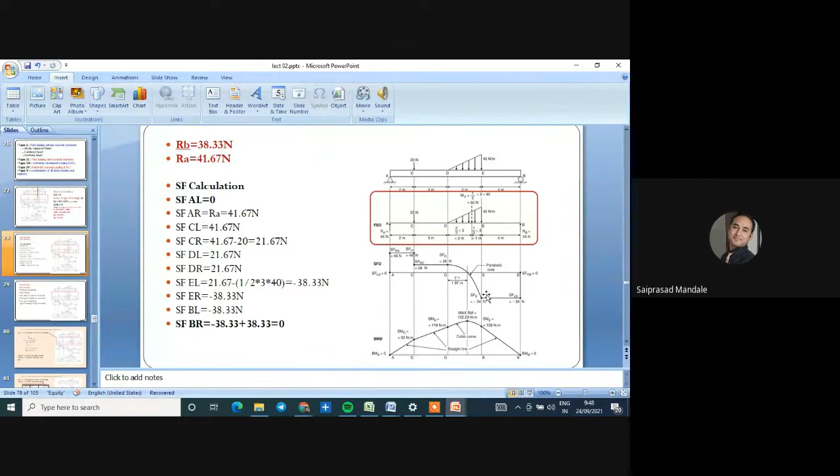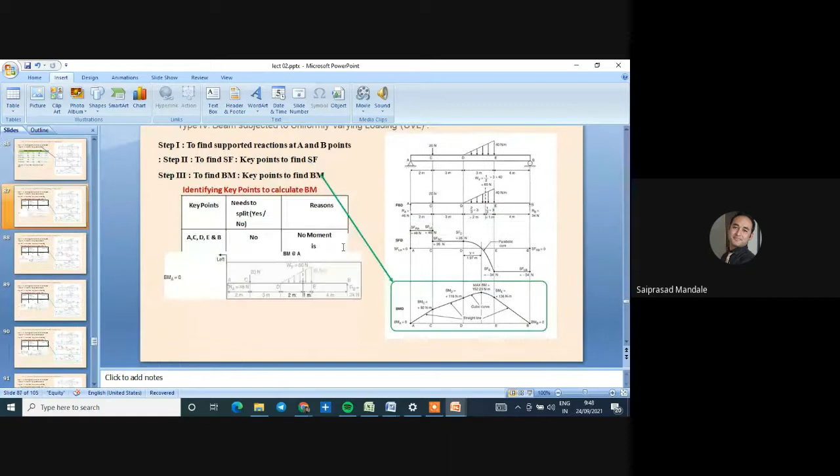I hope the calculation is clear to everybody and you have drawn this diagram. Now I am moving towards the next type of the numerical, which is now the combination of this. This is the new type of numerical, which is the combination of combined loading. Last type.

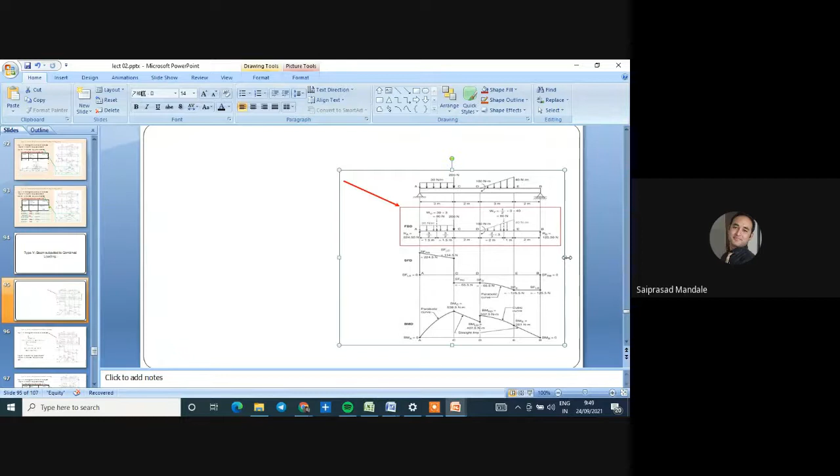This is the diagram. This is the loading diagram, and in that loading diagram, let us check what are the different loads we have with us, and from that we'll go to draw the free body diagram, and then move for the calculations. So this is the last case, type 5, which is nothing but the beam subjected to combined loading. Combined loading means it consists of point load, it may consist of UDL, it may consist of UVL, and the combination of all this. So here it is the case.

Can anybody tell me what are the different forces acting on that beam? Forces, and what are the different moments acting on the beam? Please try to tell me. Let me check from that whether my screen is visible to you or not, whether my screen is properly visible to you or not. Let me check, please tell me.

Anjali Santa, Shital Jagtap, Sonu Sunsar, Lokesh, Nilesh, Pansare, Rishikesh, Sahil Saurabh - the diagram is there in front of you. I'm just expecting what are the different forces and moments acting on that beam. Please unmute and tell me. Anyone? You can type in the chat box also. Please tell me.

Sahil is saying, sir, UDL is there, UVL is there, point load is there. Sahil, one more force, one more quantity is there which is missing. Try to find out. One more quantity is there.

दिव्या तुम्ही आहात का इथे? Tell me, external moment. Only Sahil Tang is active. What about others? Let me talk to one by one. I want very active sessions. Abhijit, I hear Abhijit. Those who are not interacting with me, I will mark them absent today. I want very active participation in the lectures.

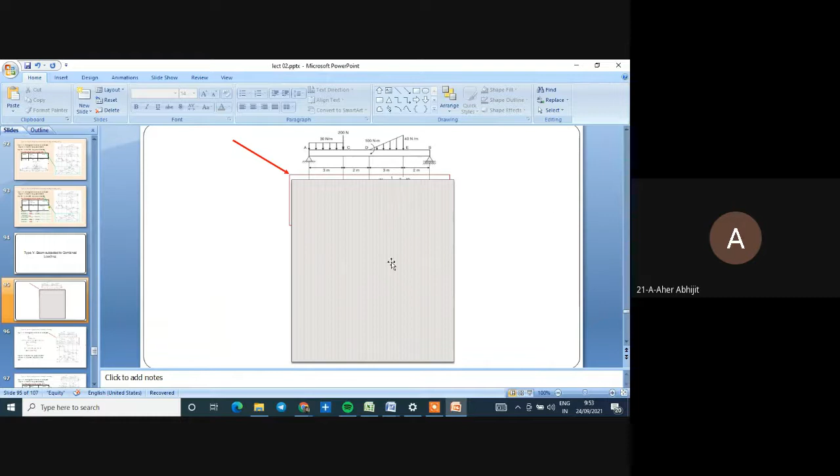युडीएल ची इंटेन्सिटी किती आहे ते सांग. What is the intensity of UDL, you can see my screen na? Yes sir. Then tell me what is the intensity of UDL. Okay, second question goes to Jagtap Shital: what is the intensity of UDL? I can ask randomly, yeah? Shital Jagtap, what is the intensity of UDL? Shital Jagtap, what is the intensity of point load? What is the intensity, what is the magnitude of point load?

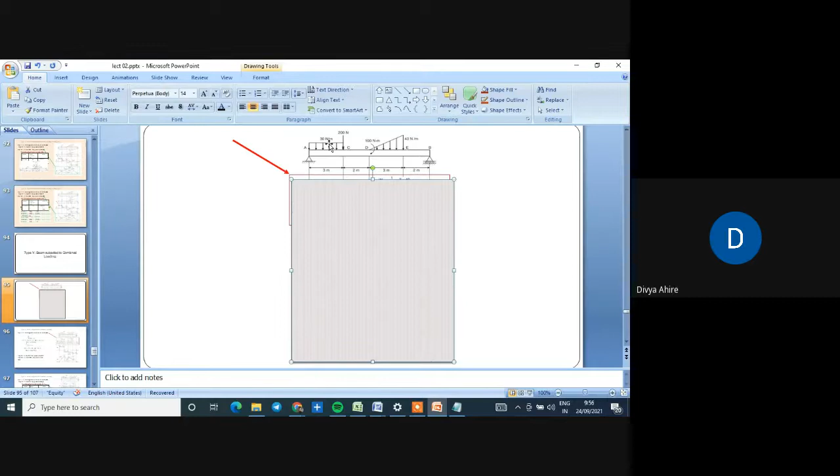I will definitely mark them absent. Divya Ahire. Divya Ahire. Yes, sir. Please tell me what is the intensity of UDL? So 30 Newton meter. 30 Newton per meter. 30 Newton per meter. व्हेरी गुड, नाईस आन्सर.

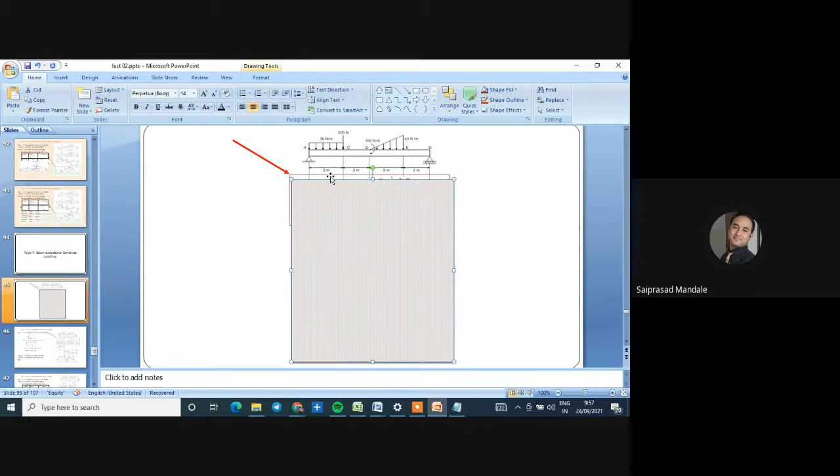What is the intensity of point load? What is the intensity of point load? Krishna Nikam. 200 Newton. परफेक्टली करेक्ट.

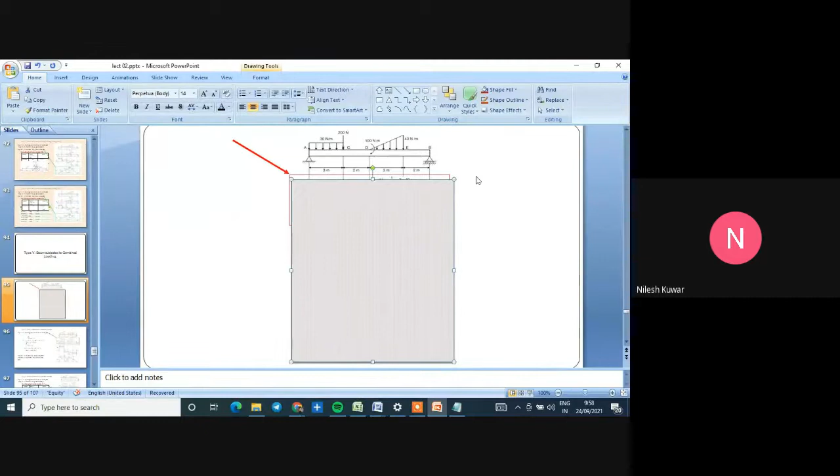0 to 100 Newton. 100 Newton meter. 100 Newton meter is the UVL? 40 Newton. 40 Newton meter. 40 Newton meter. Good.

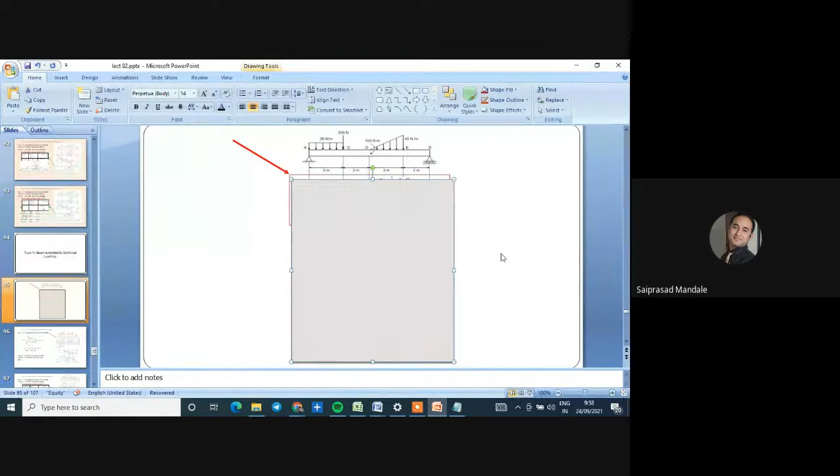Yes, sir. What is the magnitude of moment acting on that beam?

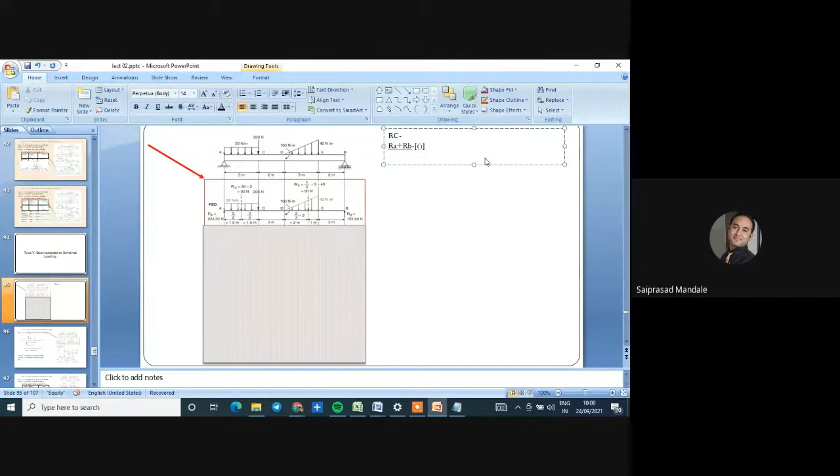बोला. हाँ 30 into 3. Very good. 30 into 3, very good. Then minus, tell me.

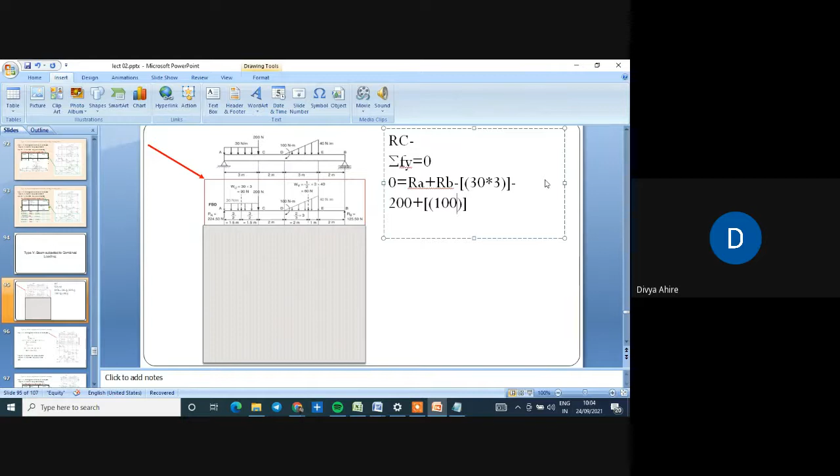Okay. Tell me next whether I have to consider this 100 Newton meter or not. Whether I have to consider that 100 Newton meter or not. Tell me. Divya? Yes, sir. 200 into 100 into 2. Tell me equation, please. Plus or minus? Plus, बोलो. 100 into 2 plus 3. 100 into 2 plus 3, na? Yes.

Now, everybody agrees with this? First thing is this is the moment, 100 Newton meter. It is already a moment. And right now we are focusing on the summation of Fy. We need a force calculation. When there is a force calculation, there is no role of moment.

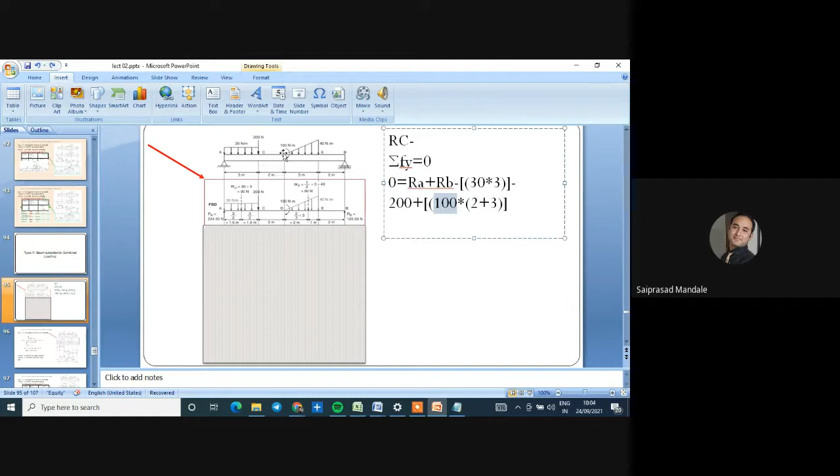Okay. And second thing is you have done over here 100 into 2 plus 3, means you are considering 100 into this distance. So already this is a moment, and again you are multiplying this distance. So it is a force calculation. So first thing is whenever there is a force calculation, we have to neglect all the moments.

So my next question is whether in that calculation I have to consider that 100 Newton meter moment or not. This is a summation of Fy. I am focusing on force calculation. Shital, can I consider 100 Newton meter over here or not? I have already given you the answer.

Reaction calculation check नाही तुम्हाला? बोला. Shital Jagtap, I am waiting for your reply. Else anybody, you can put it into the chat box. Nilesh, Sahil, Kalpesh, Devre, Nilesh Kuwar, Sahil. No reply. मग फक्त मी बोलत राहू आणि तुम्ही ऐकत राहणार असं करायचंय का?

So we have to neglect this 100. No moment. We are not going to consider the moment because this is a force calculation. So this is 200, and then we have to consider this UVL. So for UVL, half into length is 3 into width is 40. This is the intensity. Okay. Then summation of Fy is equal to 0.

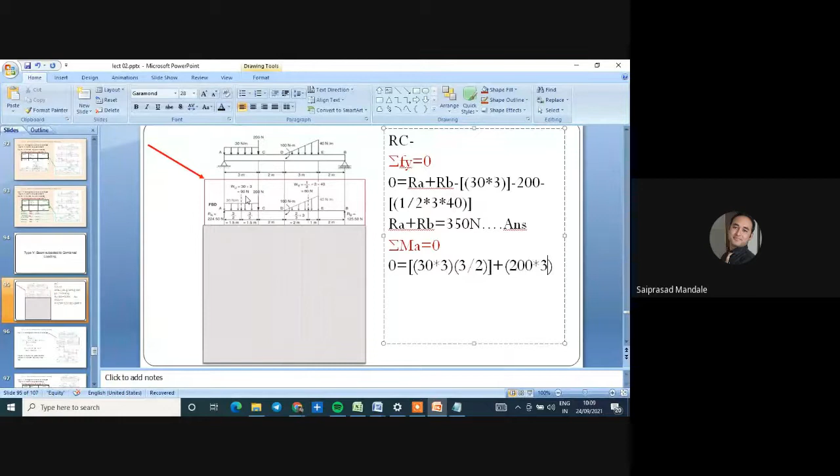Then the next step is to calculate moment. Everybody has to do this calculation and tell me the answer. Summation of moment at A is always equal to 0. Divya, can you try? 0 is equal to 30 into 3, and it acts at a distance of half, so 3 by 2. Second is clockwise, so it is plus 200 into 3. Then 100 is clockwise, directly we are putting 100.

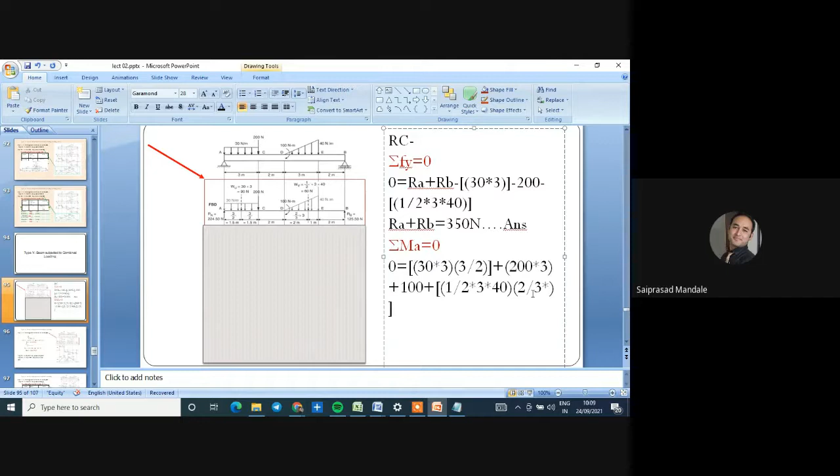Plus half into length is 3 into width is 40. Now it acts at a distance of 2L by 3 and L by 3. From 0 it acts at 2/3 of L. So 2/3 of length, 3, plus 3 plus 2. Try to understand this equation. This is a very important equation.

30 into 3 into 3 by 2. Perfect. 200 into 3. Perfect. Plus 100 is clockwise, so as it is. Now here, intensity is half into length into width. Then it acts at 2/3 from the left hand side. So 3 plus 2 plus 2/3 of L. We have to make a calculation of this.

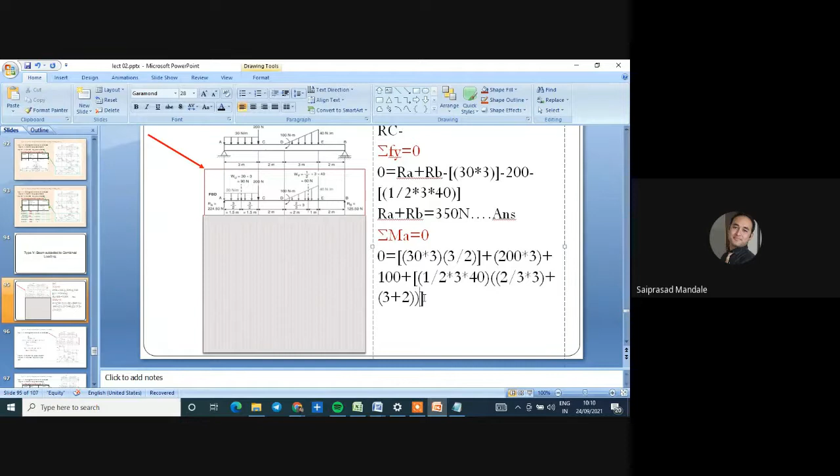And then minus RB into 3 plus 2 plus 3 plus 2, that is 10 RB. So from that you have to tell me the value of RB. If you understood this equation, this is very important. Everybody has to focus on this. If you know the answer, please tell me the value of RB.

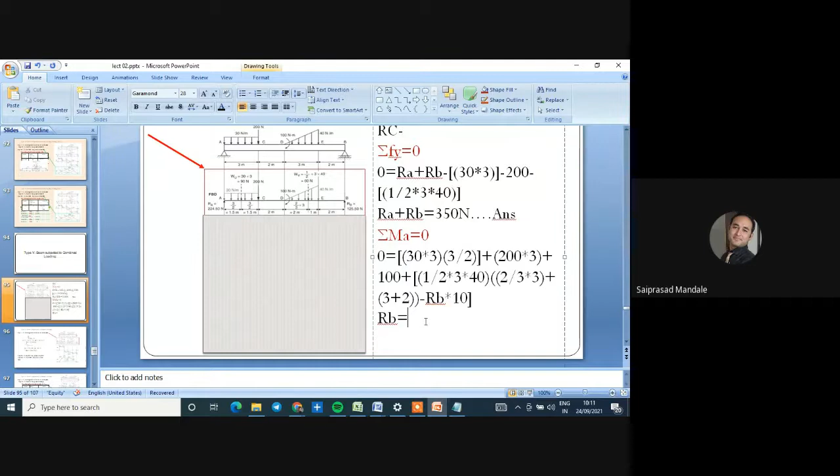30 into 3 is 90 into 1.5, so it is 135, plus 200 into 3 is 600, plus 100, plus 20 into 3, 60, and 60 into 2/3 of L means 3 gets cancelled, into 2, plus 2 plus 3, 7. So RB equals 135 plus 600 plus 100 plus 420, 1255. Here it is 10 RB, so divided by 10 is equal to 125.5. Please make a calculation whether our answers are right or wrong.

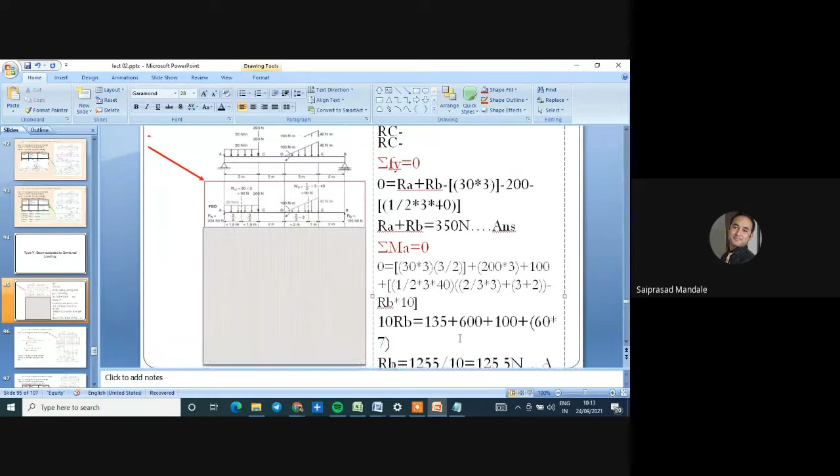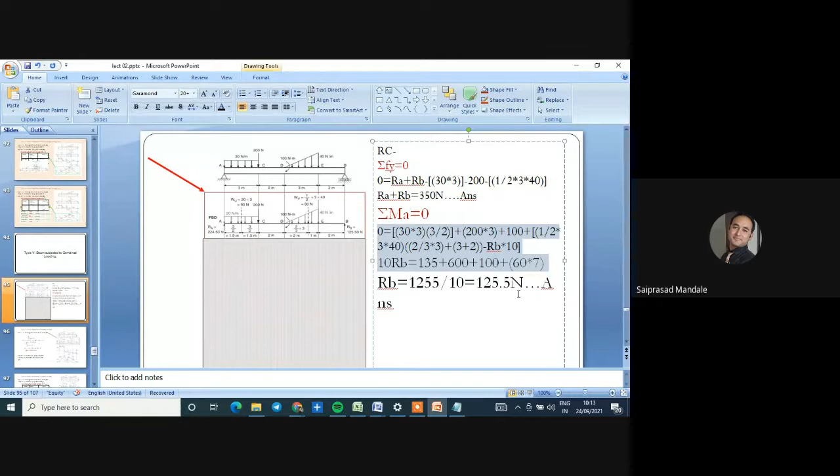Let me check the answers. So it is 224 and RA. See, 125.50. So the answers are matching. This is my answer of RB. Then tell me RA is equal to. So RA becomes 350 minus 125.5, it will be equal to 224.5 Newton. Please do the calculations and tell me whether the answers are right or wrong. Everybody has to tell me the answers.

Any doubt or query in that equation? Very important. This is a new variety, this is the combination. Abhijit Ahir? Yes, sir. काय doubt? No, sir. Shital Jagtap, clear? Yes, sir. Sonu Samsare, he is not there.

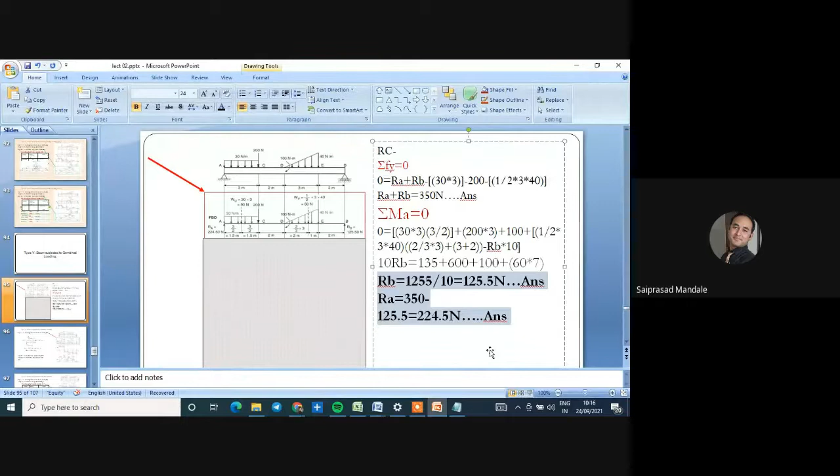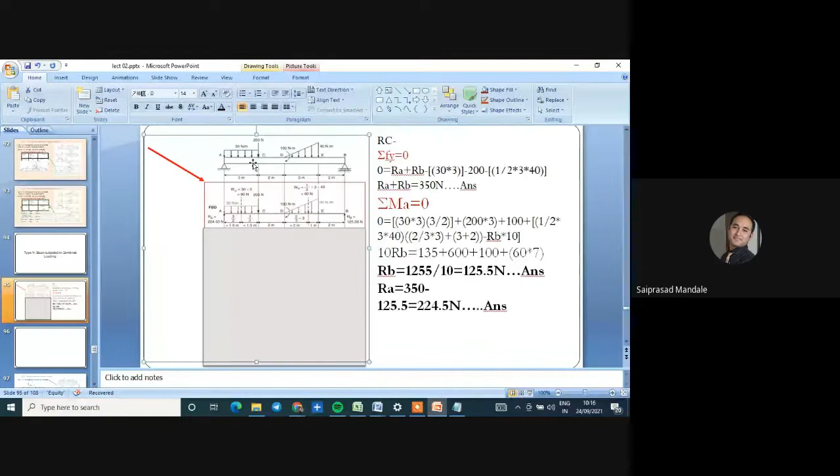Okay, good. Now this is a very important step that we have already done, and you just try to calculate whether your answers are matching or not. Okay. Then the next step is what we have to do. We have to calculate reaction calculation, SF calculation.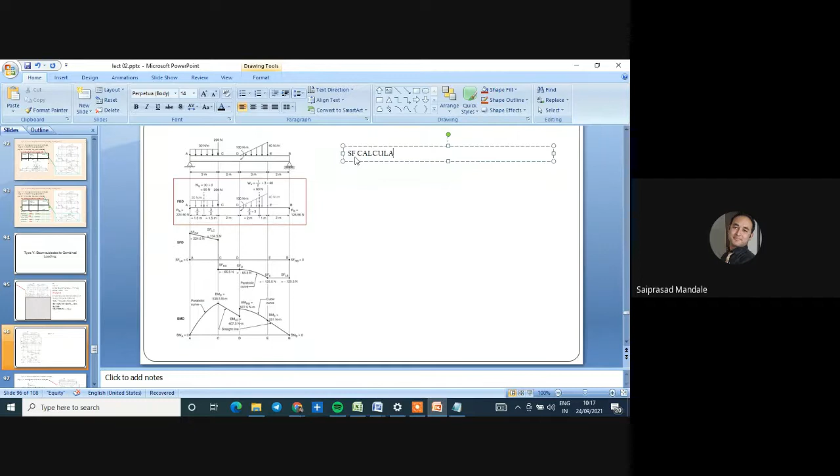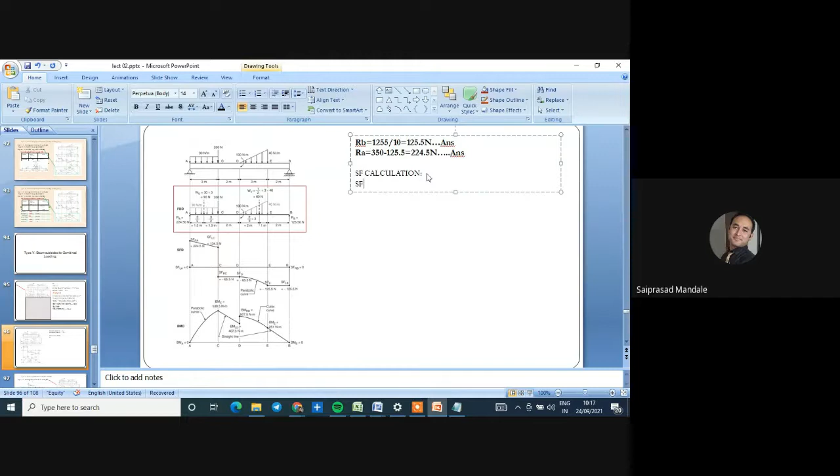A, C, D, E, and B. Okay, so is there anyone who can help me out with this calculation, SF calculation? I'm going to tell you the first answer and the last answer. I can tell you the answer at the left, which is 125.5. Minus 125.5. This is the answer. I have already given you the answer of this.

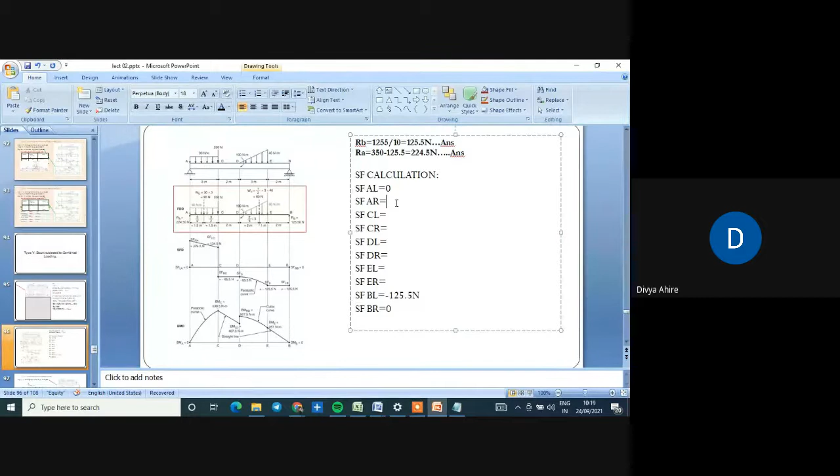So tell me, shear force at right of A. Tell me. Shear force at right. Divya Ahire. Divya. Yes, sir. Shear force at right of it. RA value. Tell me. You are right. You are absolutely right. 224.5 Newton. RA, perfectly correct. So it is RA, which is equal to 224.5 Newton. Perfectly correct.

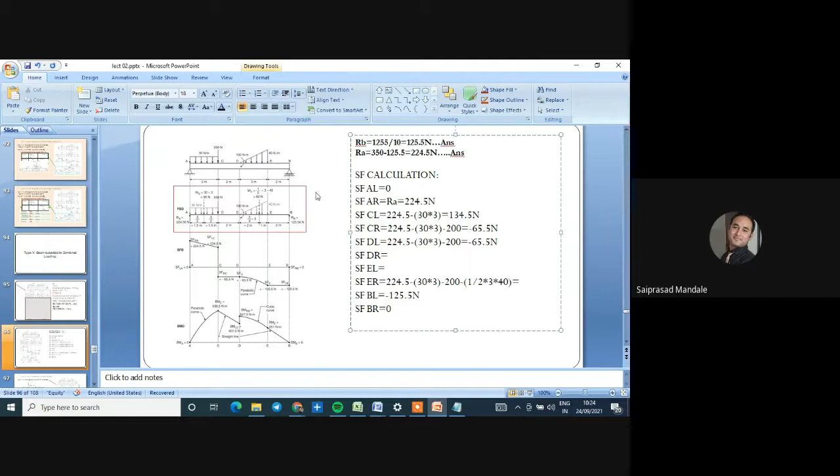Left of D is done. Left of D is same. Right of D is also same because there is no force. In the moments, we are neglecting the moment. Right of D is same. Then left of E. Left of E is this. Right of E is also this.

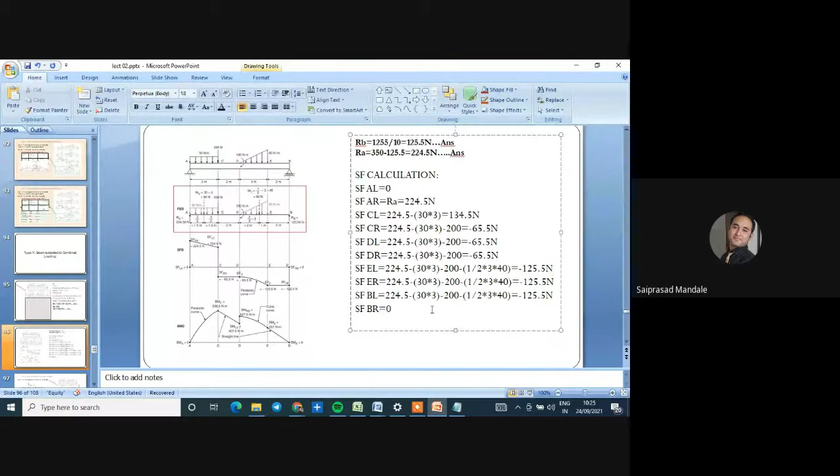And then left of B is also same. And here it should be equal to minus 125.5. It also equals to minus 125.5 Newton. You can check and you can tell me the answers. Please check the values and tell me whether the answers are right or wrong. If anybody is having any doubt, please ask me.

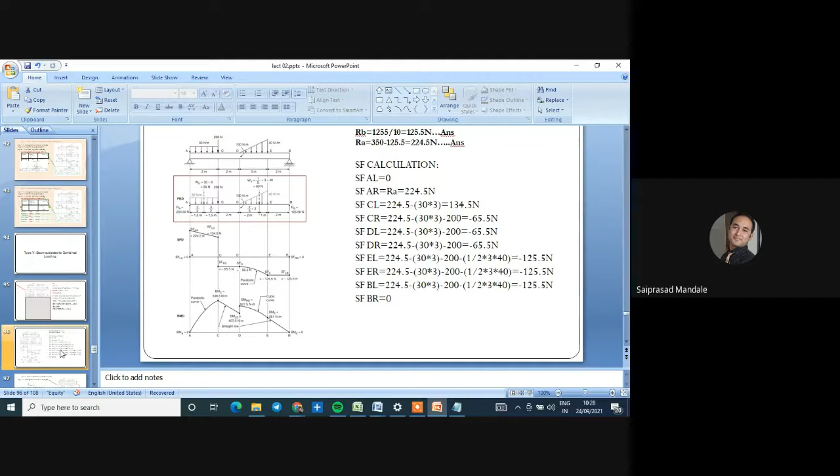This is now BM calculation. BM calculation. Moment at A is equal to how much? Moment at B is equal to how much? Everybody tell me. Moment at A is equal to, moment at B is equal to.

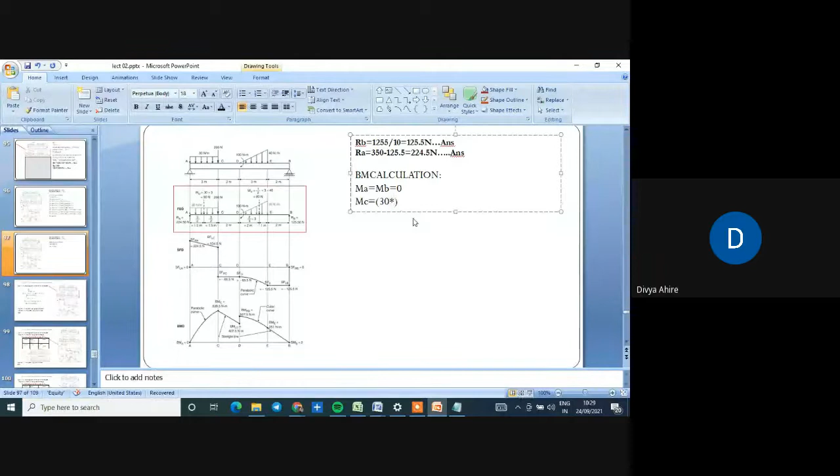Moment at C. Tell me, moment at C. Divya, fast. 30 into 3 into 3 by 2. Clear? Yes, sir. This is first, then we won't consider 200, then moment at C is done.

Moment at D is equal to 30 into 3 into 3 by 2 plus 2. Okay, then minus 200 into 2.

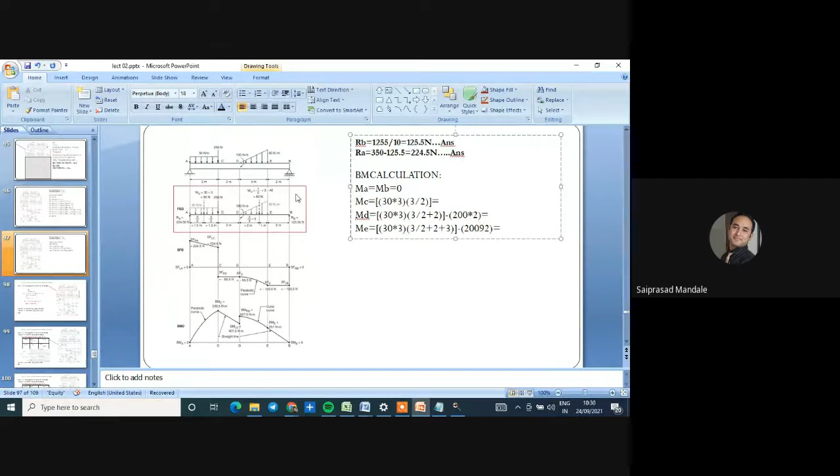Moment at C done, moment at D done, moment at E is equal to 30 into 3 into 3 by 2 plus 2 plus 3, minus 200 into 2 plus 3. Then now it is minus as it is triangular.

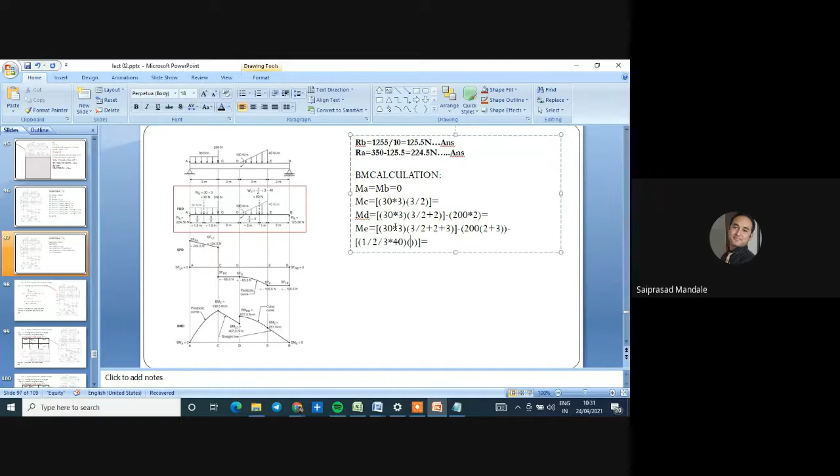So again the intensity is half into 3 length into height, 3 into 40, into the distance, which is L by 3. So L is 3, by 3. Finish. And it is the answer.

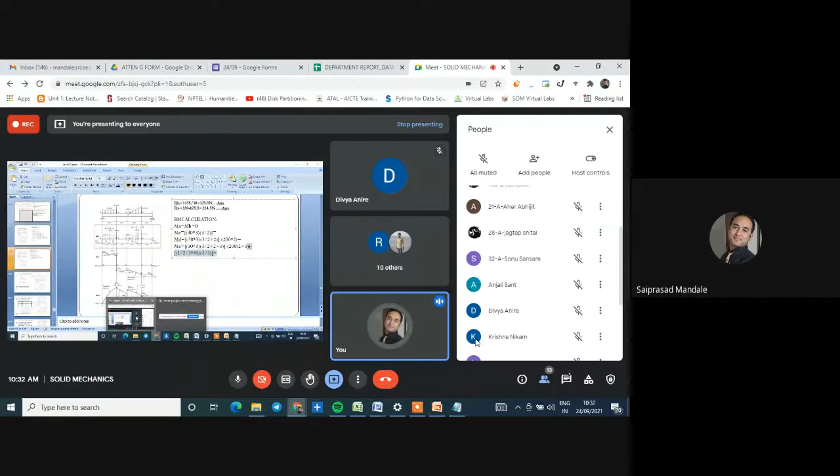Up to this, there is no doubt, I think. You will be having doubt for this only. Maybe, it is my consideration. Somebody has pinged me something. Moment at C, 90 into 3 by 2. Moment at C. Okay.

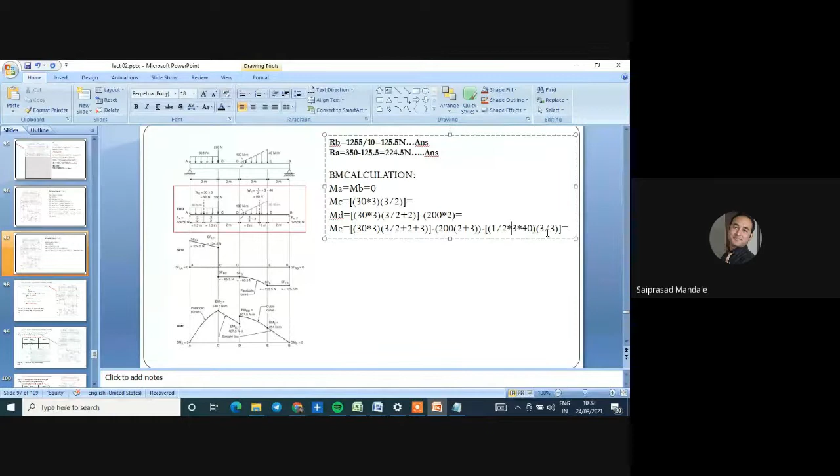This is the equation. This is very simple. You have to consider only force and distance. So it is half into length into height, the intensity. Half into length into height into L by 3. So L by 3 means 3 by 3 is the distance. These are the answers. You have to calculate the answers on your own, and I have already told you the way to draw the diagrams.

Here is a structure for the diagram. These numericals you have to solve in the assignment. I have already given you the calculations for SF and BM. So the target for you is to draw SF and bending moment diagrams only.

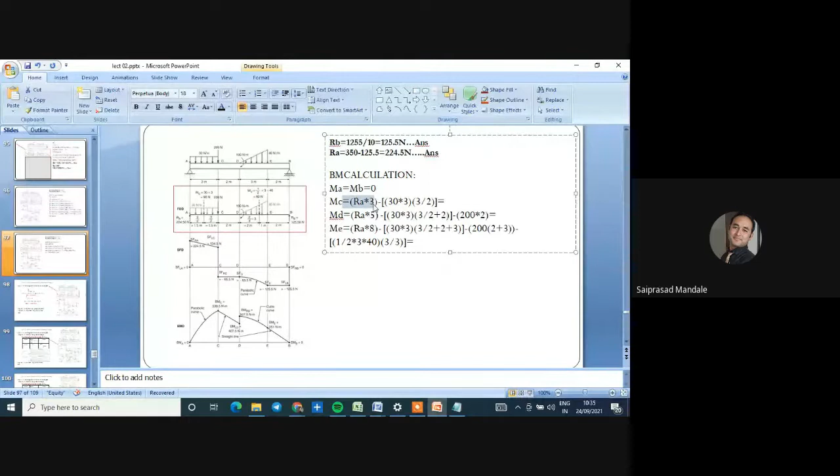Okay, so I missed this RA. Everybody has to focus on this. These are simple things you have to focus on. The term RA I missed, but Sahil told me it was missing. So this is the equation. Go ahead with the calculation, and you can cross-verify your answer with this.

As per this, it should be 538 point something, 538.5 Newton meter. And moment at D is 507.5 Newton meter. And moment at E is 251.1 Newton meter.

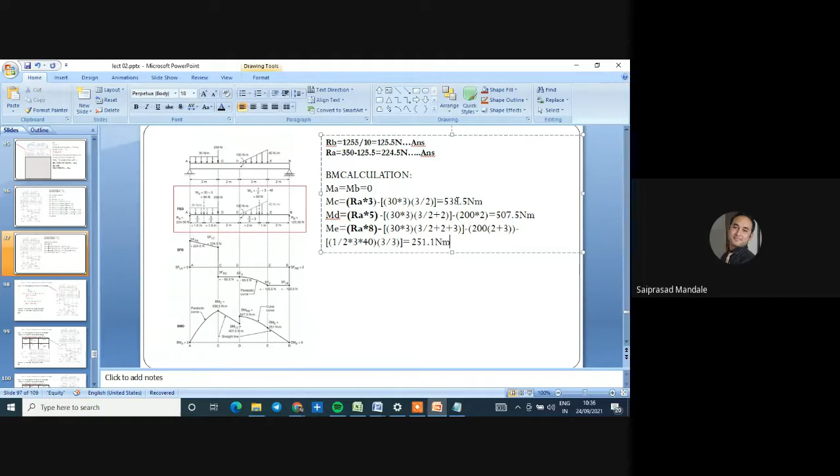These are the answers, the probable answers. You have to calculate and check the answers. This is the numerical for your assignment. You have to do that in your assignment.